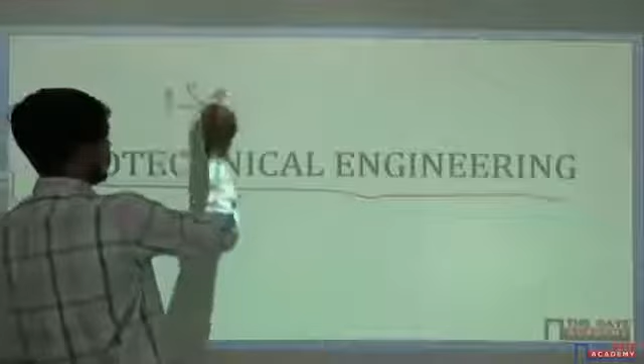So today we shall be starting a new subject, that is geotechnical engineering. The other name of geotechnical engineering is soil mechanics.

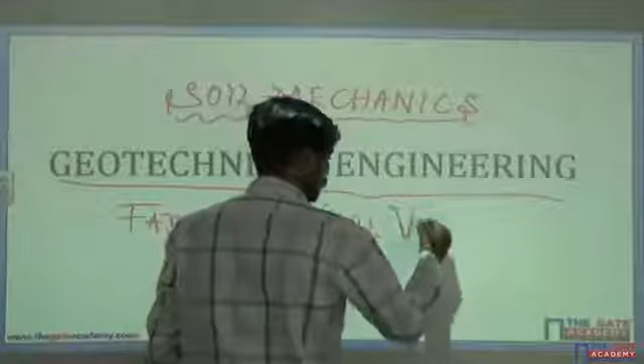Before starting the subject itself, I will ask you a very good question. Can anyone tell me who is the father of geotechnical engineering? Can anyone answer? Who is the father of geotechnical engineering or soil mechanics? Yes, he is none other than Karl von Terzaghi.

This is his full name, Karl von Terzaghi. Karl von Terzaghi is known as the father of soil mechanics or geotechnical engineering.

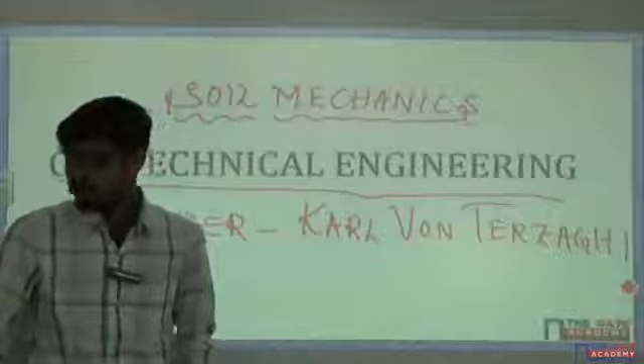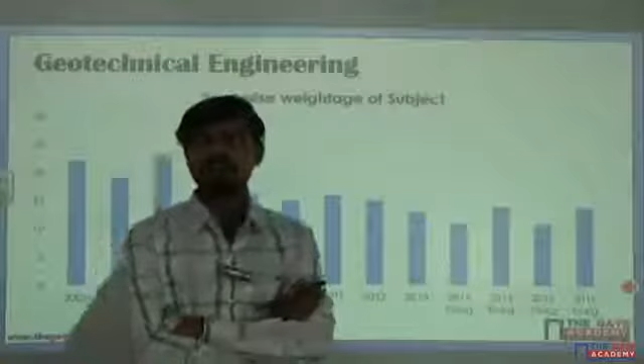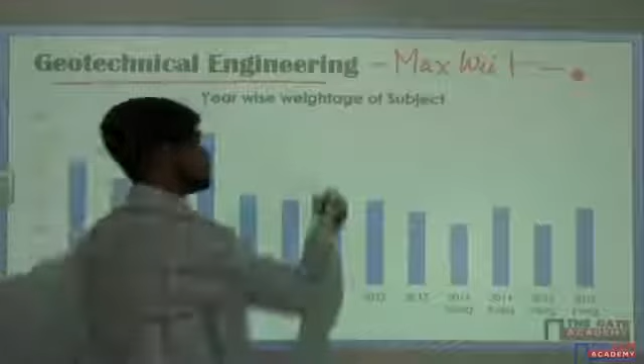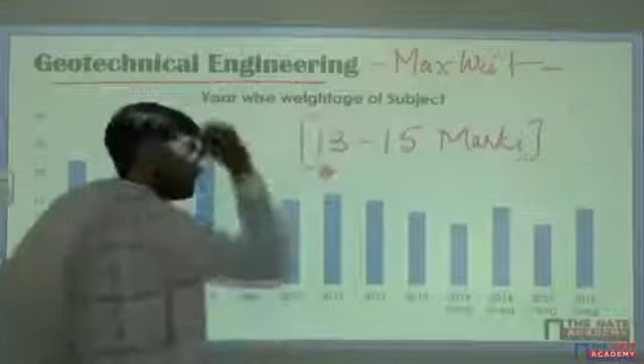Now coming to the year-wise weightage of the subject. I hope you know the GATE syllabus correctly, you know all the subjects. This is the subject which is having the maximum weightage. What is the average weightage? On an average you will get around 13 to 15 marks from this subject, that is soil mechanics or geotechnical engineering.

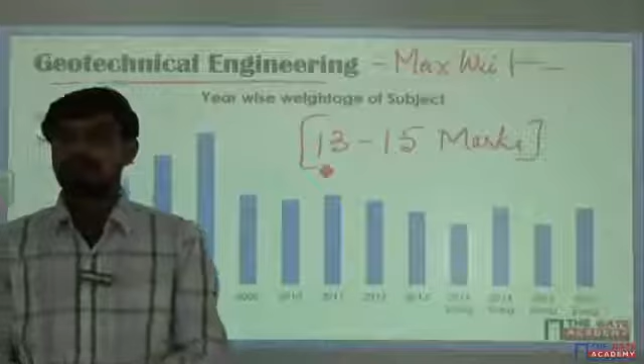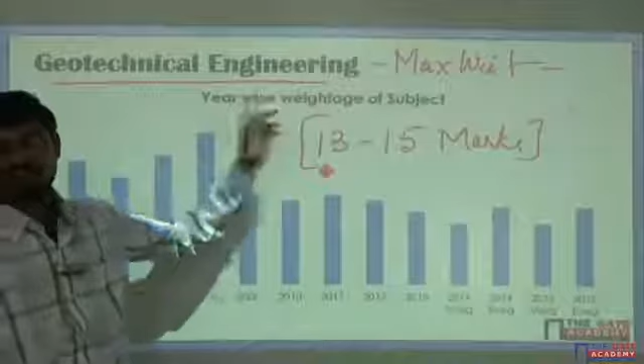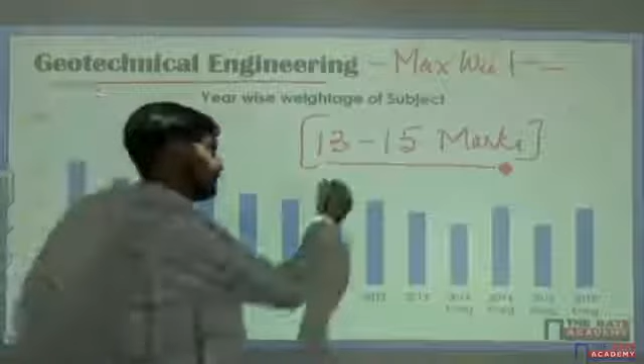Note: the people who want to get a good score or good rank in GATE, they cannot skip this subject, that is geotechnical engineering. You have to be perfect in this one. And remember one thing, scoring this 15 marks is easy.

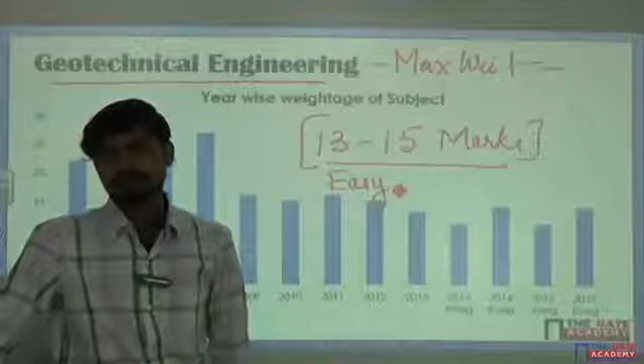Provided there are two things that you have to concentrate on here. Why is this subject given so much weightage? Why for geotechnical engineering a lot of weightage is given? The main thing is that there are a lot of concepts, many concepts, plus there are a lot of formulae. You have to remember everything here, especially the formulas and the concepts. If you are perfect in all the formulas and concepts, then you can solve any kind of problem in geotechnical engineering and you can score this 13 to 15 marks very easily.

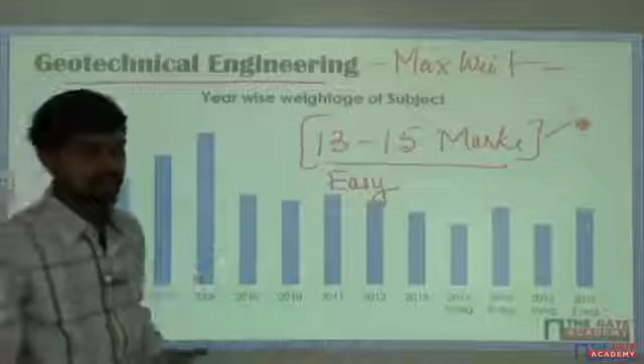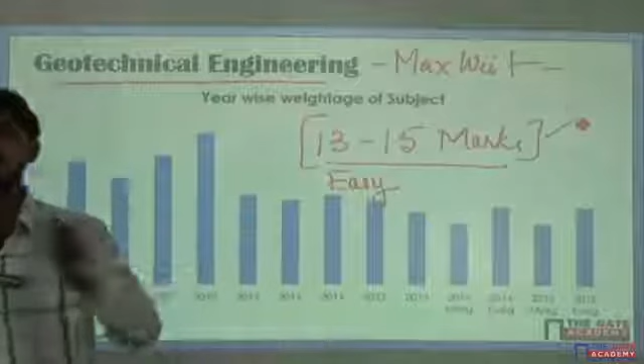So, as I start the class, remember whatever topics I complete today. So today, if you are free at night, just go through it once, then try to solve more problems from your workbook, whatever you are having.

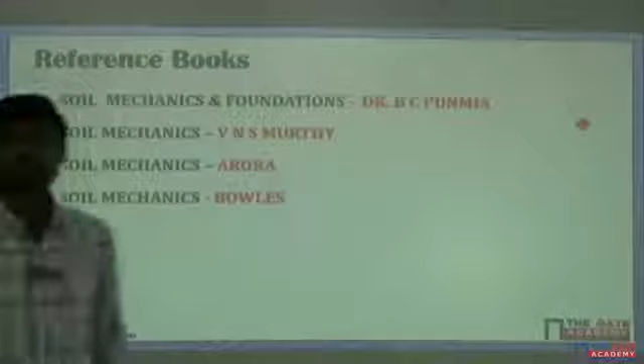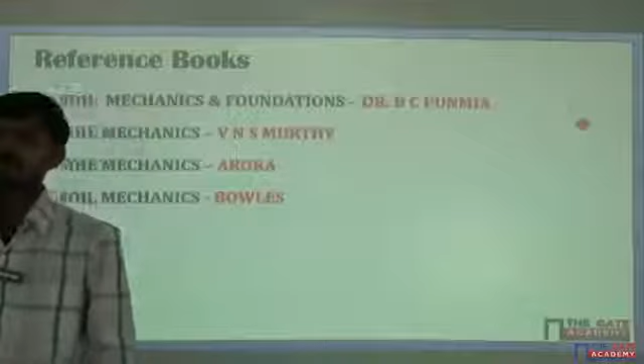Now let us see what are the chapters included. Sorry, we shall see the reference textbooks. Reference books are also important for us. I think you people are all from India. I don't prefer any reference textbook for any other subject, no need to study any textbooks. If you have any doubt, just go through some points, that is more than sufficient in other subjects.

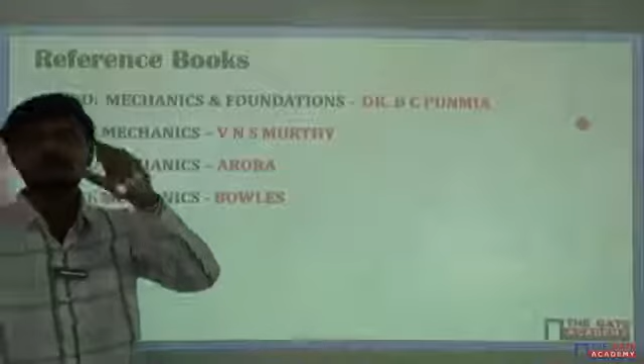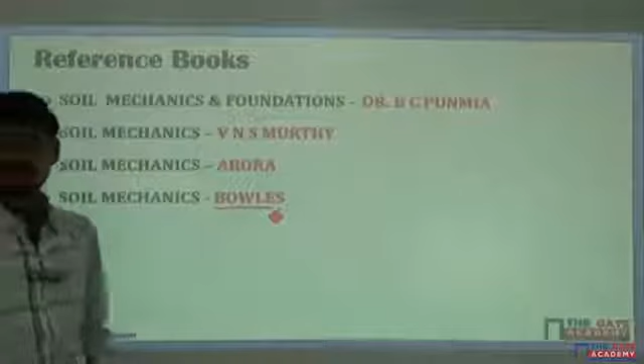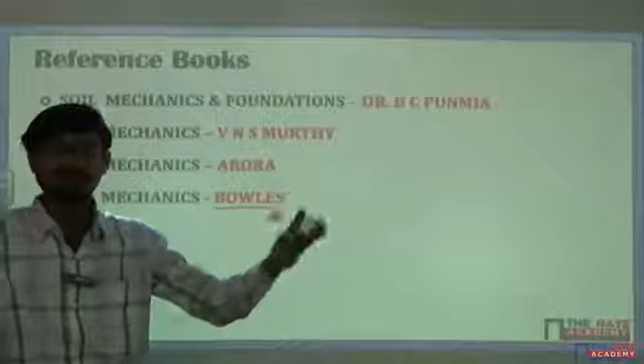But when you come to soil mechanics, that is geotechnical engineering, you should have a reference book. The standard book for soil mechanics is Bowles. Bowles is the standard book which we refer to. But it will be very difficult for you to understand this Bowles. You know, we are Indians, we need simplified formulas and simplified results.

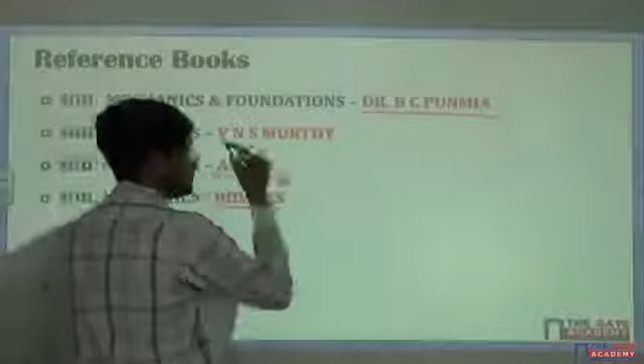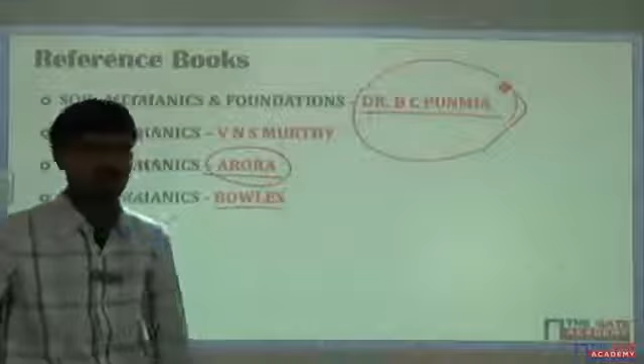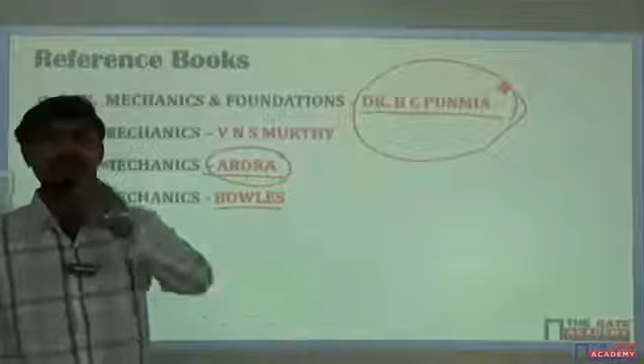According to me, you can go through Soil Mechanics and Foundation Engineering by B.C. Punmia and Soil Mechanics by Arora. These two are good books. There are a lot of numericals in these two books. There are a lot of objective questions in Arora. You can find many IES questions, previous IES questions, all those things in BC Punmia. So try to have one reference book for soil mechanics, it will help you. I prefer BC Punmia or Arora.

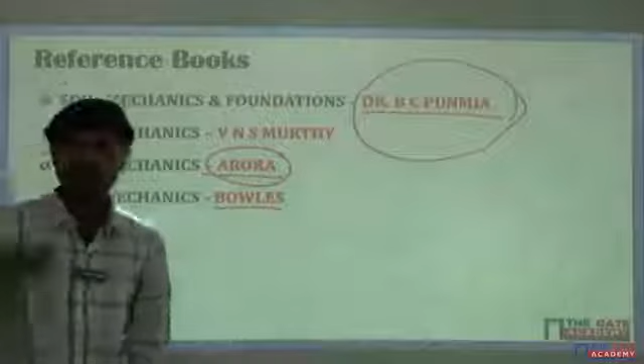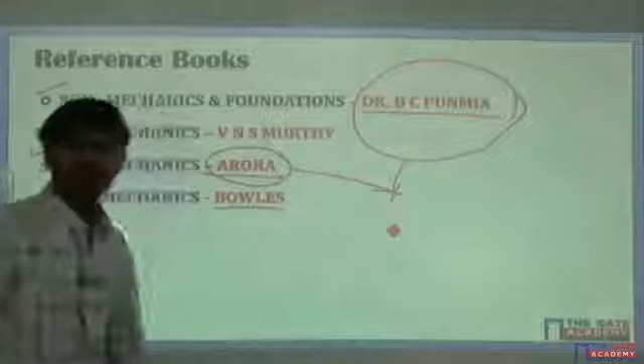VNS Murthy is also a very good book, but the thing is it is too bulky. You cannot understand anything in Bowles easily, it is difficult. If your English is really good, top class, then you can understand from Bowles. Otherwise, no. So I prefer these books. In your engineering, if you have used any other book which you feel is easy, you can refer to it, it's your wish.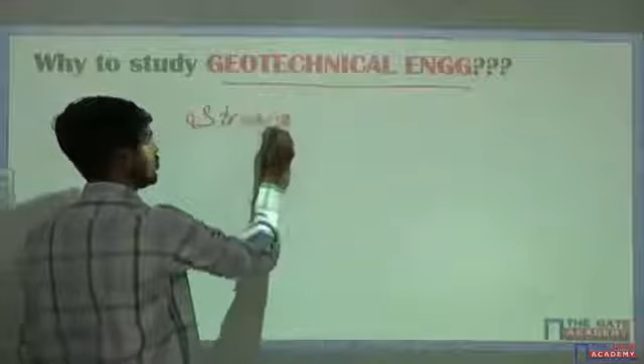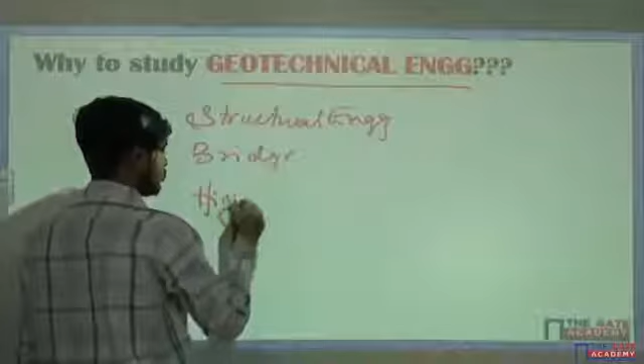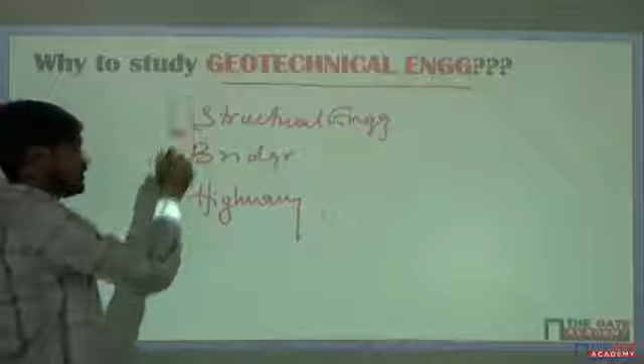Now, why study geotechnical engineering? What is the importance of geotechnical engineering? Whatever concepts I explained, that is more than sufficient. Geotechnical engineering, see here, if you are a structural engineer, if you are a bridge engineer, highway engineer, anything, you may be any kind of engineer, you can do masters in anything. But remember, geotechnical engineering plays a very important role in all these things.

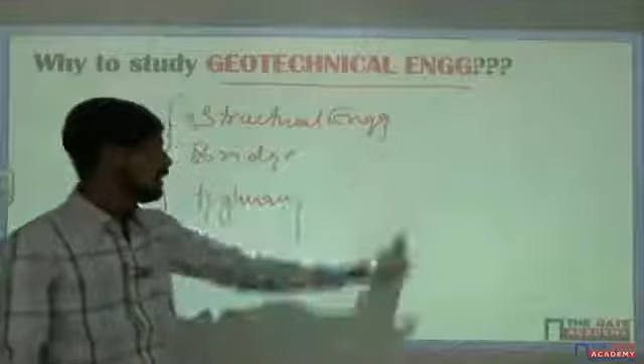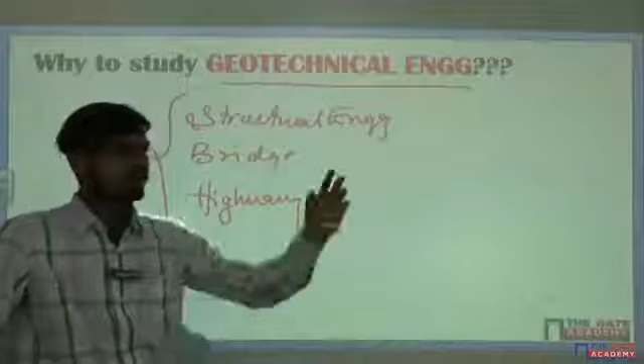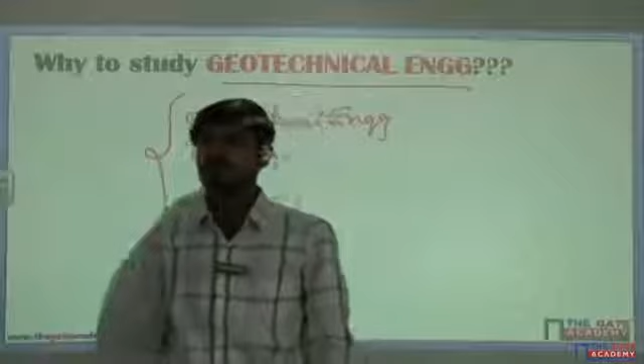Suppose if I take a structural engineer or a bridge engineer, they are mainly related to structures. So as they construct a structure, if you consider a structural engineer and a bridge engineer, they are related to construction of huge structures. Where they are going to construct, it is with respect to soil only. They have to construct in the soil layer itself.

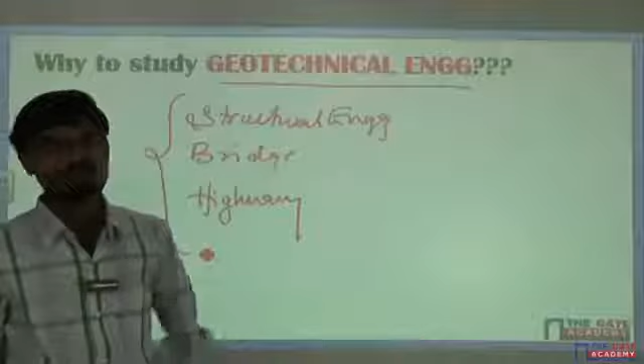They have to provide the foundation. To provide the foundation, they should know the properties of soil there. Without that, they cannot do anything. Consider two types of soil, a sandy soil and a red soil. You cannot provide the same kind of foundation in both cases.

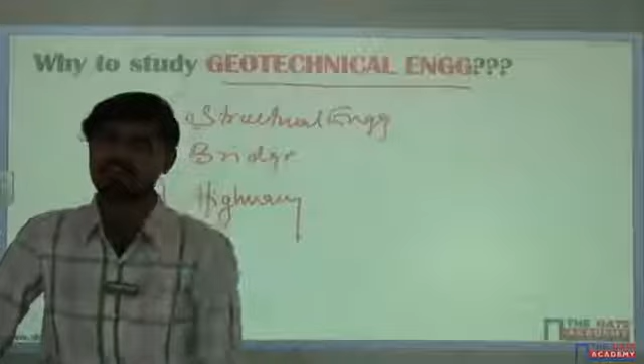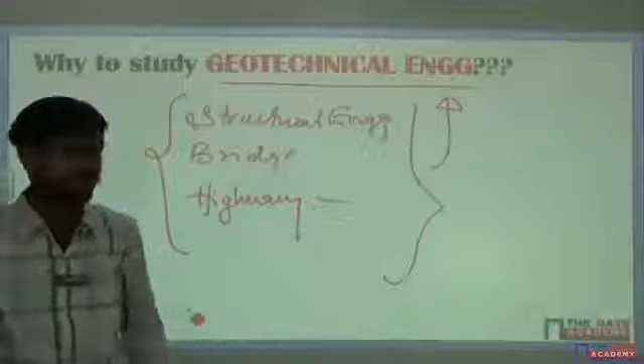When you come to a highway engineer, he is responsible for pavement of roads and all, so he should know which type of soil is there. Every engineer should have a basic knowledge in geotechnical engineering. That's the second reason why there is more weightage for geotechnical engineering in GATE. At least you should know the basics. For a structural engineer and a bridge engineer, the bearing capacity of soil is one of the important terminologies required for the design.

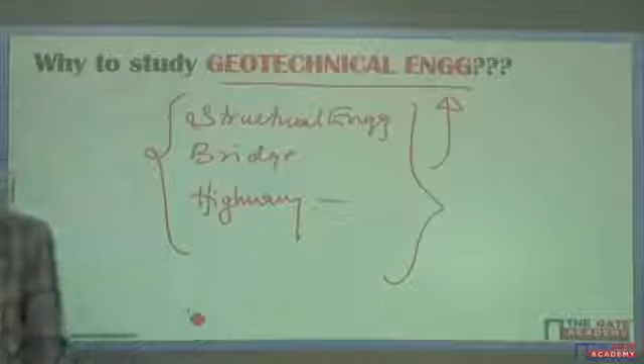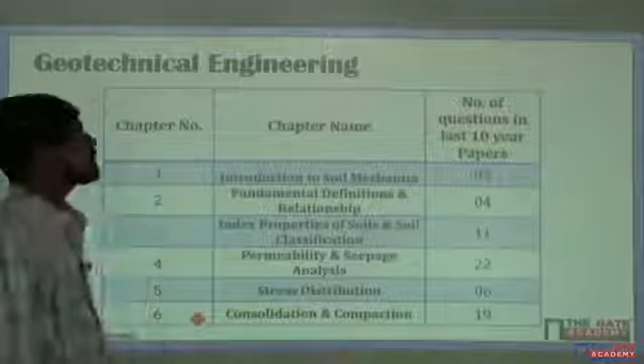Now the next thing. The whole syllabus of geotechnical engineering I have divided into 12 chapters or units.

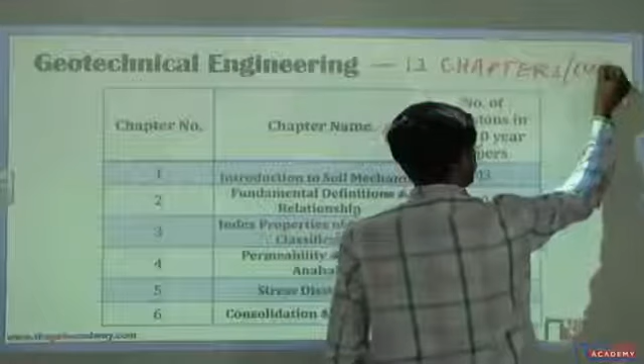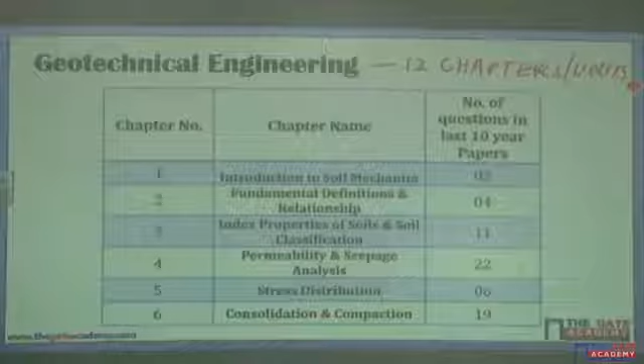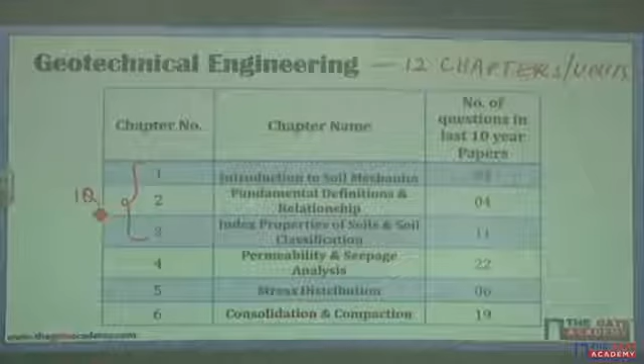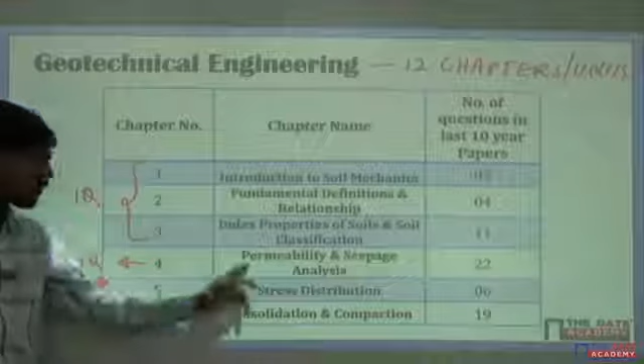In these first 6 chapters, you will get one question from the first 3 topics. You will get one question from permeability and seepage analysis. This is not a small chapter, it is a very huge chapter. I have further divided it into 4 chapters. We shall see that when we discuss that chapter.

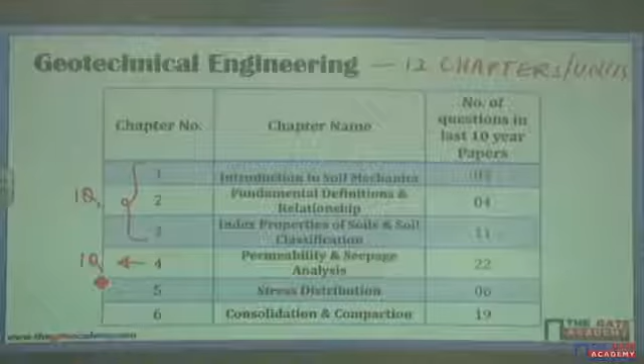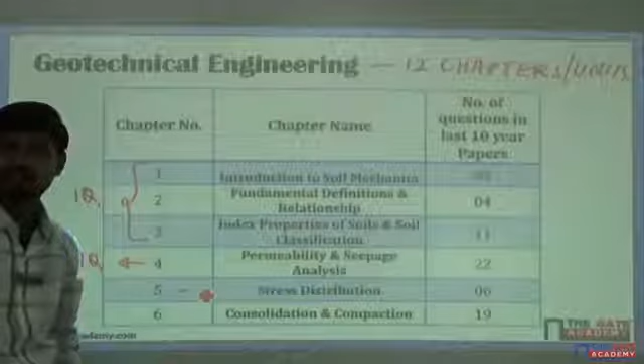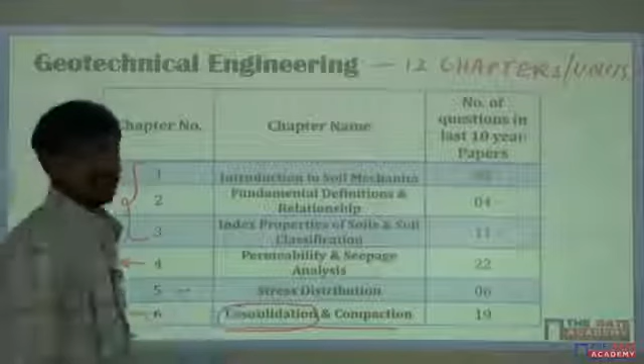Next, stress distribution. You may get a question, not sure, only 20% chances. Consolidation and compaction - the most important chapter is consolidation. 99.99% sure you will get one question from consolidation.

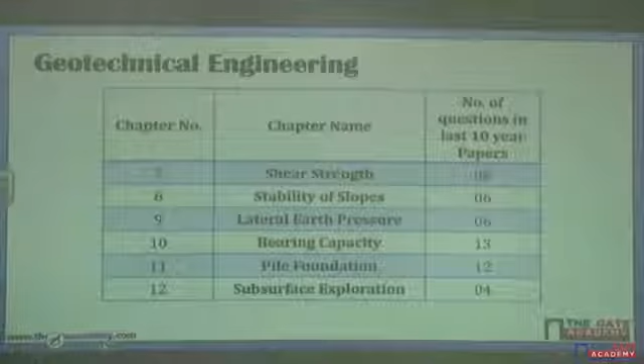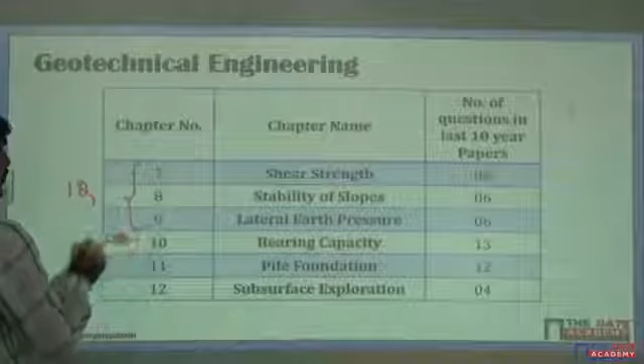Okay, what are the next chapters? Shear strength, stability of slopes, lateral earth pressure, bearing capacity, pile foundation. From these first 3, you will get one question. From bearing capacity, you may get one question, 90% sure. From pile foundation, you may get a question, 90% sure. This is not such an important topic.

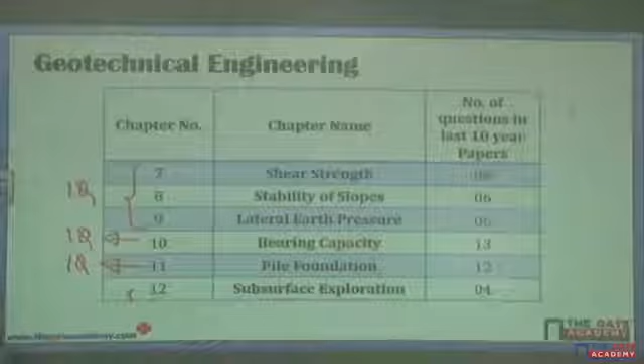Subsurface exploration has many theoretical things, with very few important formulae. Introduction to soil mechanics is a completely theoretical chapter.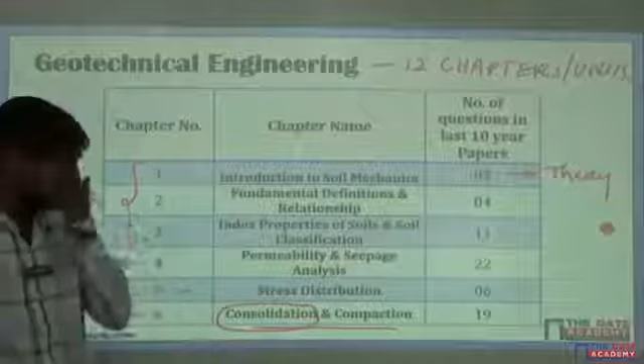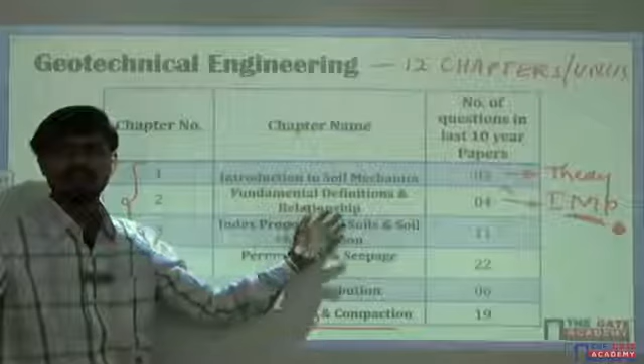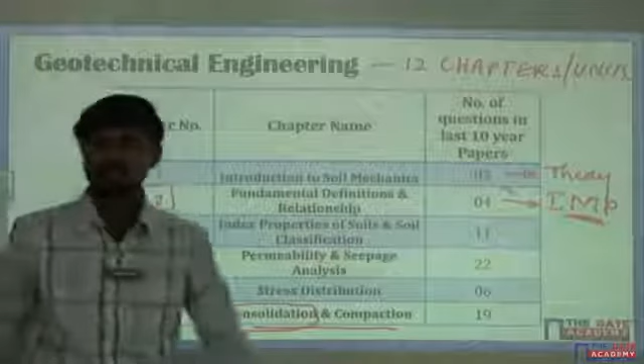Now remember, this is the basic chapter which is important. You may not get a question from this chapter, the second chapter - fundamental definitions and relationships. But I will tell you one thing: if you don't know these fundamental definitions and relationships, you cannot do anything in soil mechanics. This second chapter is the most important one because these are the fundamental things. You should know all the definitions, be perfect in definitions, ratios, formulae, etc.

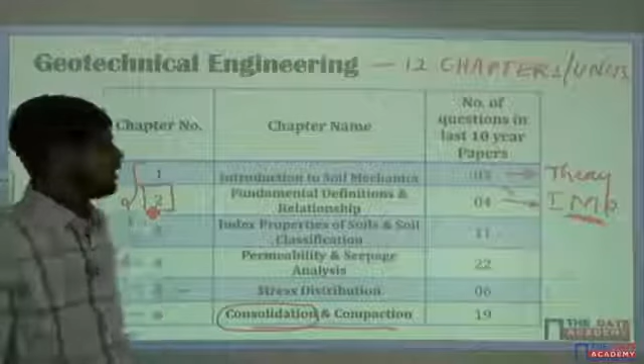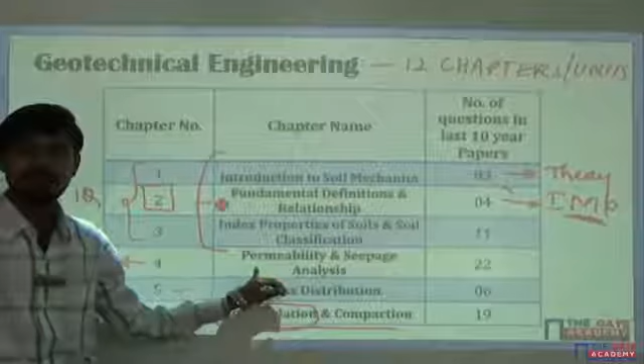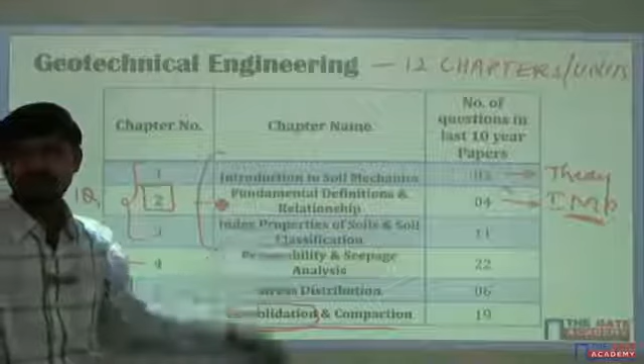The first three topics are somewhat boring, nothing I can do about that. After that, when we start with permeability, the classes will be really interesting. Till here, there are mainly theoretical things and formulae only which you have to learn by heart - nothing much to understand in these first three topics. But from the fourth chapter onwards, it is completely concepts.

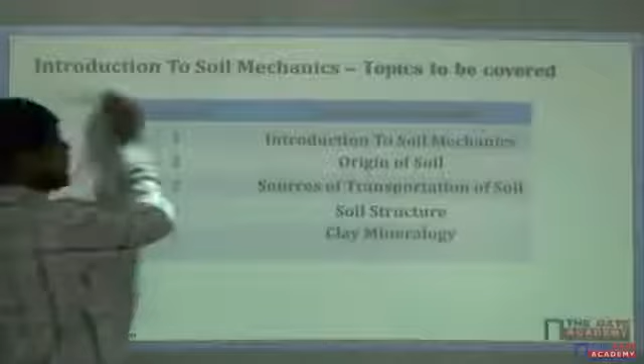Let us start. Now, first thing - what is soil? We shall start with the first chapter, that is Introduction to Soil Mechanics, chapter 1. Okay, what is soil now?

Can anyone define soil in rough words? If I ask a farmer, what will he say? Soil is nothing but a material - he will say it is a material which helps me in growing crops. That is according to a farmer. If you ask the same thing to a doctor, he will think, then say, what is that? A simple question - it is a material, a layer on the earth's surface. Other than that, he cannot explain anything.

The same thing - if he asks me, what is penicillin, what shall I take? What will be my answer? If a doctor asks me what is penicillin, I will say, injection, sir.

The same thing, if I ask a geologist - he will answer in a very good manner. What will he say? It is a material which is formed by rocks. Now, according to a civil engineer, how do we define soil? It is a loose material from weathering. Yes, very good, both the answers are correct.

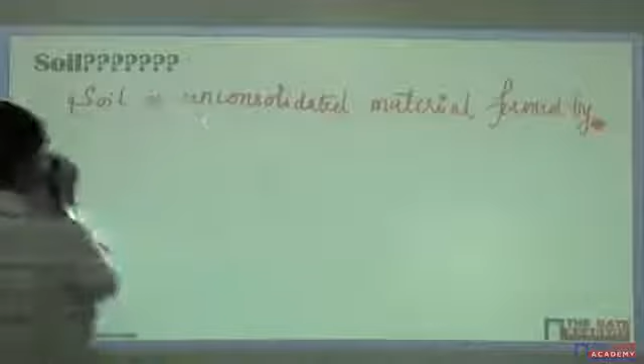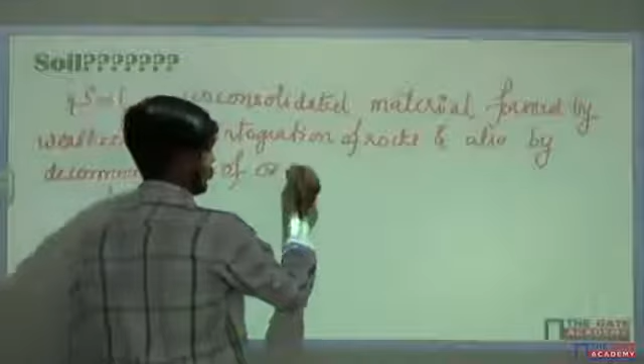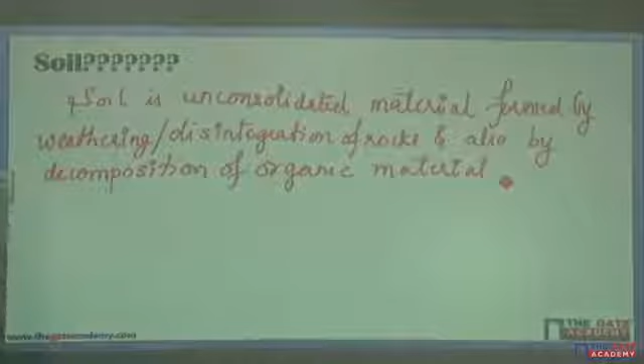Soil is unconsolidated material formed by weathering or disintegration of rocks, and also by decomposition of organic material. This is one of the definitions which, according to me, is good. What is soil? Soil is unconsolidated material which is formed by weathering or disintegration of rocks and decomposition of organic material.